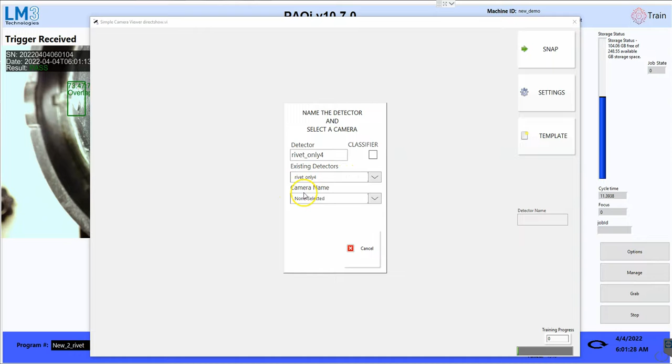So when I go into train new, I have the option to add a new detector altogether or select from existing detectors. So in this case, I'm going to train this rivet detector and choose camera 1 to start. What this will do is open up a live view of the part, and when I first do a snap, it's going to take a picture and it's going to open the labeling program.

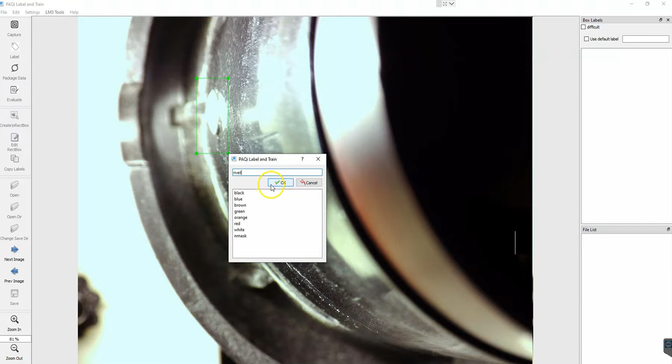In the labeling program, you'll want to label your objects as they were trained if we're training more on a detector. So rivet, and this is a notch.

You'll notice if I go to QC Hero and this particular detector, look at the training data, there's many notches, many rivets. There's a couple attempts at a barrel, but I wouldn't use this because it looks like it was added after the fact. So we got our notch and our rivet. We save, close the labeling.

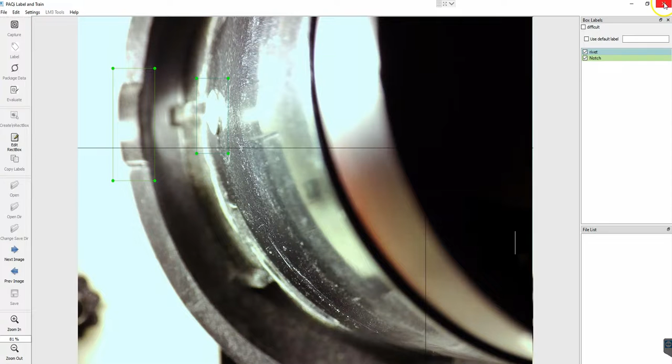It'll go back to the live view, and at this point I can snap a number of pictures for the first camera, and then I'll repeat this with the second camera. Now, if you were to be moving the part around, you'd want to change the template out, because what's happening as I snap these pictures, it's copying the labels from the labeling program over to all the images that I snap. So you just hit template, and when you snap again, it'll open the labeling program so you can change the label or change the position of the objects.

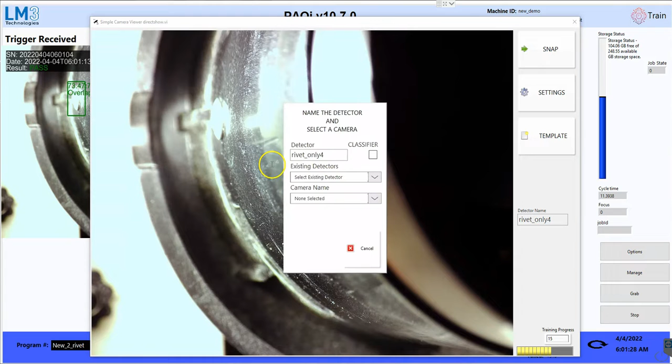So I'm going to get to 15, and then I'm going to switch over to the other camera. 25 was required to do training, so there's 15. So I go into settings and leave everything as is except for change to camera 2. And then this will open the live view of camera 2. As soon as I snap, it'll open the labeling program so that I can label this.

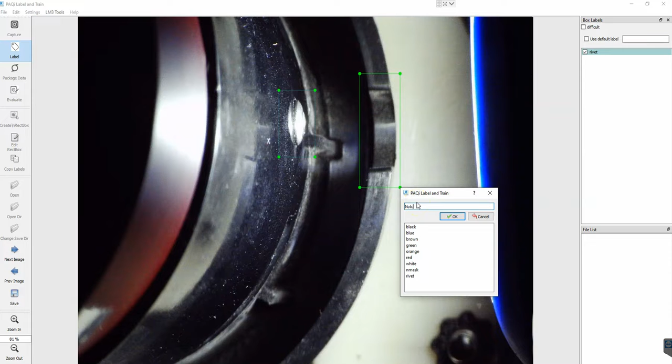So again, in the labeling program, I want to label the objects consistent with how they were labeled in the first place. So we got a rivet and a notch. Save, close, and then now I can go ahead and snap the rest of my pictures and start training. Okay, well, I'm going to get 30, so there's 15 of each. So you can do as many pictures as you want, but you should get at least 25.

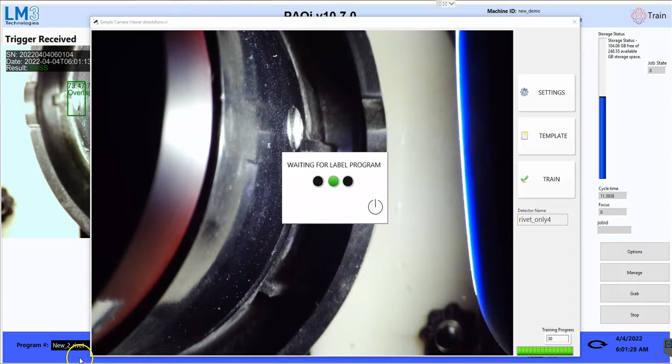And as mentioned, I want to change the template if the position of the objects in the field of view have changed. So now I go to train. It'll open the labeling program one more time to verify the labels, and then training will happen automatically. Now I'm back at train, and I'm kind of in a different mode. It's more of an editing mode where you can move things around, but you can always create new boxes if there's a mistake.

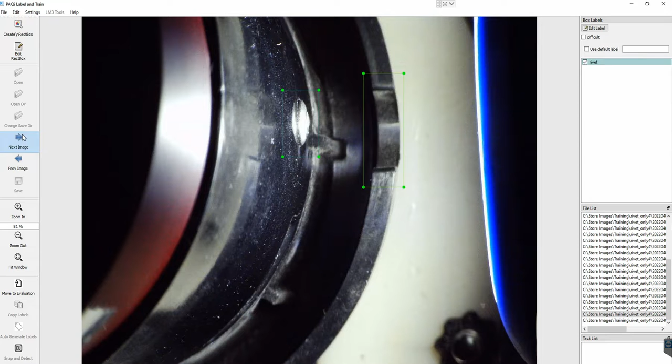So you want to just verify all these images, make sure everything's labeled correctly, all the way down to the last image, because all of these are going to be used for training. And then I can close, and it'll pop up a tool for adjusting settings, in particular, how fast you want to go. I'm going to leave this at max accuracy, and I'm going to add my name or my email address to be notified when this completes.

You'll also notice that this popped up the configuration tool for adding new part numbers. So you can use this wizard if you're adding a new part number. We're training on an existing, so it doesn't really apply, but I'll do one anyway. So I'll call this new PN. Call this new PN. These should be named the same for this version of the program. I'm going to run one step.

Enable camera 1. Say yes to detect. I'm going to select the rivet only for detector. That's the only one I have an option for because that's what I just trained. And then I'm going to add a new calibration. So I'll call this new PN cal. And I'm going to remove all these rogue objects. So let's remove these objects. So we're left with just a notch and the rivet, and I'm going to go ahead and mask the rivet. Save.

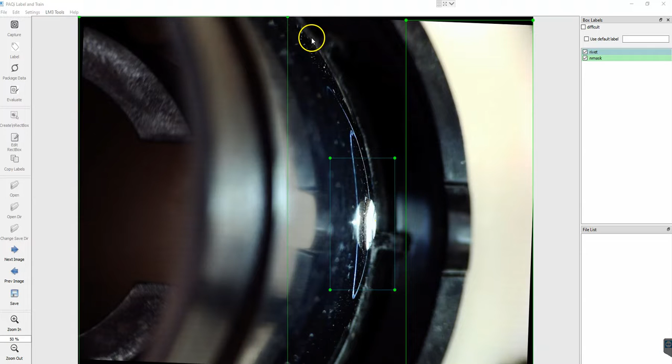Let's say that we want to mask this area too. We'll just highlight that area. So this rivet can move around in this curvature, so we should be fine with those masks. Save and close, and this will get stored to the configuration so that those physical areas get masked. I'll go ahead and save. Next, I've assigned all cameras for the number of steps I configured, and then it'll give me an option: display always, operator override, disable the masks.

So that's done. I have trained a new detector, and I have set up a new part number. Well, I didn't train a new detector. I trained an existing detector using the new method, which is perfectly fine. So let's go ahead and run the part number that we just set up.

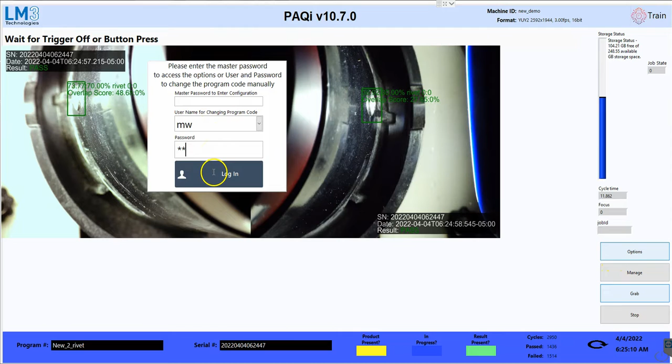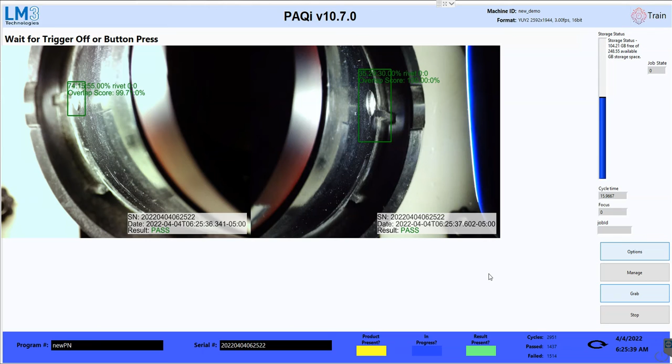So I go to Options, log in my account, just my initials, and then switch from new 2 rivet to new PN. And then when we go ahead and grab to trigger an inspection, we'll see that it inspects just like the old part number because we just pretty much copied it. So that's all for this session of the training.